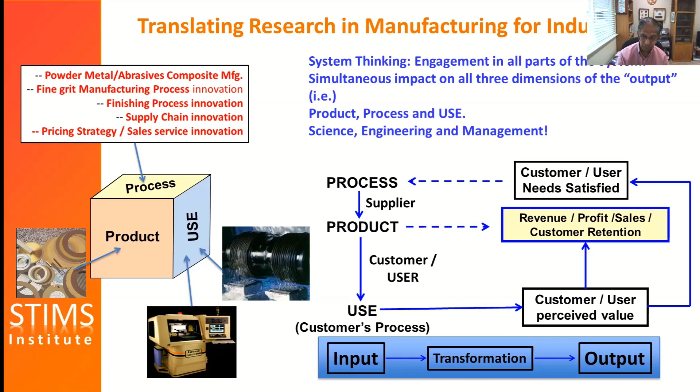What is the science of grinding? In fact, this model for science of grinding can be used for any number of applications. First of all, if you think of any abrasive application, you've got an abrasive producing a chip, and then abrasive, if it's not producing chip, it is plowing or displacing the material, or sliding on the work material, or the chip sliding on the bond material, chip sliding on the work material, or the bond itself sliding on the work material. So it doesn't matter what abrasive application you can think of, these are the 6 interactions that are taking place all the time.

So when you've got 6 interactions, you've got a normal force and a tangential force, so you've got 12 vectors. So every grinding application comes down to managing the grain work, bond work tribology, machining cycle, grain work, bond work tribology as a function of time, chip bond, chip work tribology as a function of time, so that the 1st vector is here, 2nd is here, 3rd, 4th, 5th, and 6th.

And within the 3rd vector, which is machining, you design a grinding cycle where you have a very high force in roughing, semi-finish, finish, and so forth. When you come to spark out, you're having only grain work tribology. So in which of these 6 interactions or 12 vectors are you interested? Why? Are these time dependent? For how long? Can they be constrained to be within some limits?

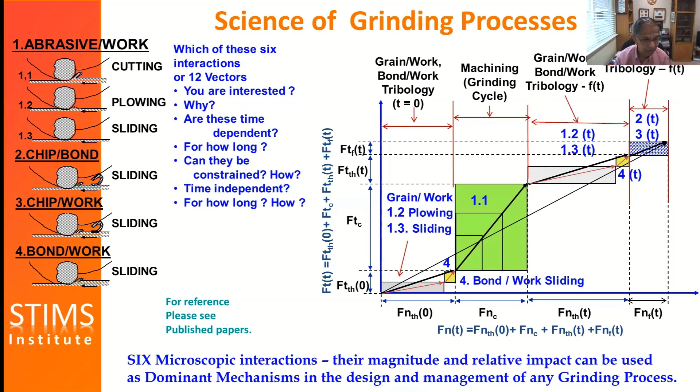So essentially, 6 microscopic interactions, their magnitude and relative impact can be used as dominant mechanisms in the design and management of any grinding process. So I have finished teaching you the science of grinding in 2 minutes. Okay, now let's go to the science of ceramic materials.

In the grinding of ceramic materials, the same interactions have to take place, but the only difference is the grain-work interaction can be cutting, which will lead to brittle fracture or ductile deformation. There is hardly any plowing, or there will be a lot of sliding. And this is from the literature. You can get the whole thing from the reference for this.

Essentially what they say is, when the radius of the indenter is large and the applied force is large, it doesn't matter what you do, you'll always have cracks in ceramics. When the radius of the indenter is small, even then when the applied force is large, you'll have brittle cracks of a different kind; you will also have a median crack in addition to lateral cracks. Whereas in a ductile material, whatever the radius or force you use, there will always be deformation.

But there is a sweet spot in ceramic materials where the radius of the indenter is small and the force applied is small, and you end up having ductile deformation. Now, the reasons will vary with the material, its fracture toughness, and so on. But essentially, you're trying to operate in this regime. And if you operate only in this regime, it will be called ductile regime grinding.

But on the other hand, you can always be sure, because of this interaction, some interactions will take place in the direction of brittle fracture, some towards ductile deformation. But it depends upon the chip thickness, which is the volume of indentation. It depends on the force per grain. It depends upon the abrasive particle size, which influences both of them.

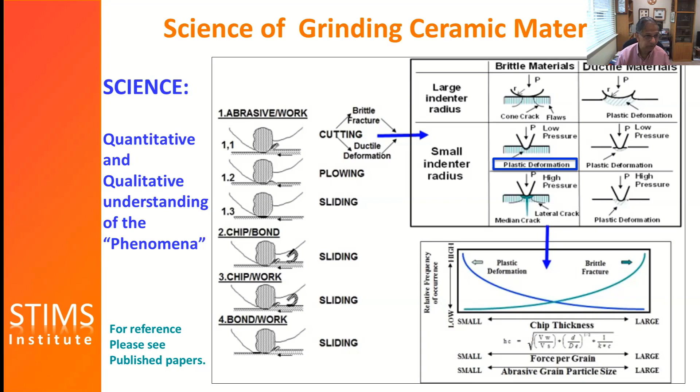So essentially, the more you skirt towards the left-hand side, you have ductile deformation. The more you move to the right-hand side, you've got brittle fracture. So in addition to the general issues of grinding that you normally deal with, you have to manage this balance. Essentially, that's what makes the difference between ceramic grinding and grinding of ductile materials. Okay, now we have understood the science, but you have to translate that into application. That's what engineering is all about.

So that same picture I showed you now becomes translated into how it is affected by machine tool properties, processing tool properties, work material properties, operational parameters during the process and output. It'll take me some time, so I will not go into the details. So essentially, you're trying to stay mostly on the left-hand side and never go into the right-hand side. But you can live with some degree of brittle fracture, as long as it's not substantial.

And you can live with some brittle fracture in roughing, but you can get it off in finish grinding, just like you remove the very coarse surface roughness of rough grinding in ductile materials and reduce that in finish grinding. Except here, you're not trying to manage the surface finish, you're trying to manage the micro cracks. Typically, most of the literature said ductile regime grinding, operating only in this regime, but that is not economical or practically feasible.

So what we did was take what is available in the literature, we came up with this model, and we understood that we had to stay in a certain regime. Within that regime, you can design a roughing grinding cycle and a finish grinding cycle for economics, productivity and so forth. And you could indeed achieve very high surface quality and low brittle fracture and cracks.

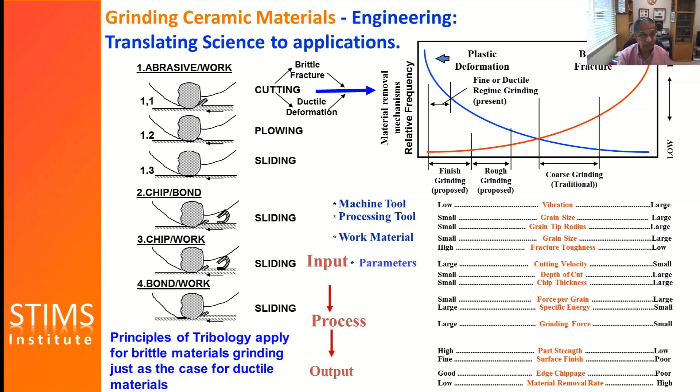As a scientist, I'm not here to make politics or arguments or anything like that. But that is what science allows you: to think differently from others. Now, you can go crazy, because a scientist is also supposed to demonstrate his capabilities in areas that did not exist before.

Here A1 and A2 are two surfaces, both on the same material, except when thermal issues are not managed, it's not brittle fracture. When thermal issues are not managed, you'll end up with A1. When thermal issues are managed, you get a very good surface, A2. Also, you can grind very mirror-like surfaces on a cylindrical surface or a flat surface.

You can take a hollow tube and grind it into a worm and create a spring out of it and then collapse it like a metal spring. If you bounce a metal spring, you can bounce it forever, it may not break. A ceramic spring also, by the way, I have bounced with a great degree of confidence, except you bounce it 10 or 20 times, it will break eventually. But you can make ceramic springs and collapse them just like a metal spring.

You can grind ceramics to a very thin diameter, as shown in E, without any end support, because the force per grain and the grinding conditions are so good that you can manage that, and because the material has its own inherent strength. You can grind a silicon wafer, which is a brittle material, and bend it like a plastic sheet of steel. You can grind a sapphire so plane and so good in surface quality that it becomes transparent.

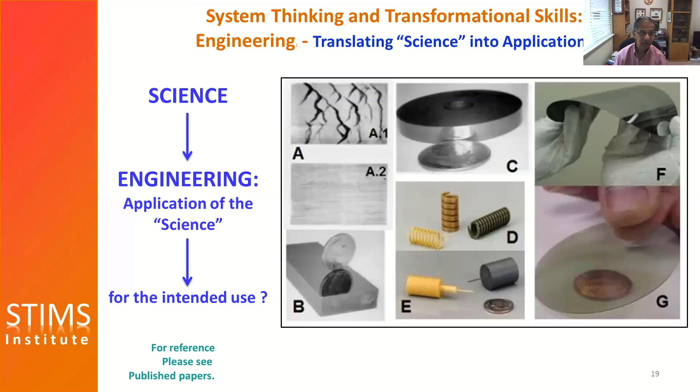So all this research becomes useless unless there is somebody to listen to. So I took this work and visited many companies who had a need. And lo and behold, this is where serendipity comes. IBM, San Jose, this is where I'm living now. I made this presentation. A gentleman by the name of Dick Satterfield told me that they have a need to make thin film heads for the disk drive industry.

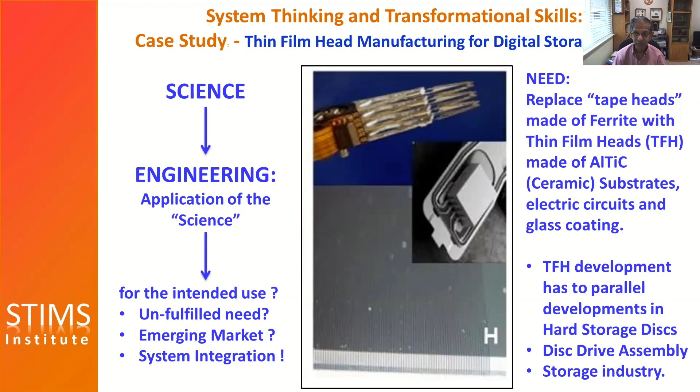So essentially, I've done the science, you've done the engineering. Now you have to go into the application of the engineering for an intended use that's not fulfilled. But you also have to make choices. It has to be an emerging market. It also requires system integration. This is where the word system comes in. So this was for thin film head development for the hard storage industry. So essentially what you see here is the thin film head.

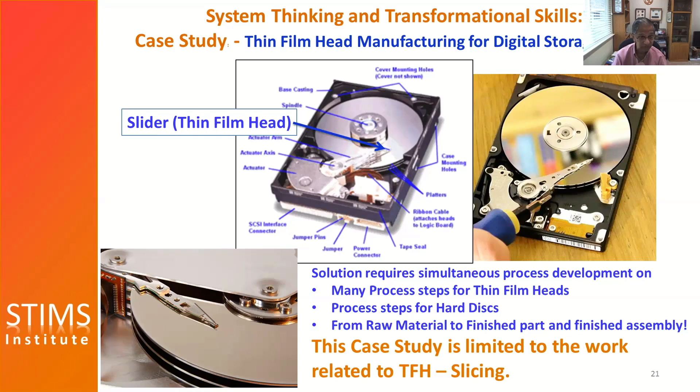Now, again, there were so many steps involved in this process, but let me just stay with only the slicing portion of it. So essentially, we ended up with a grinding wheel. It's a metal bonded grinding wheel, with a thickness of 40 microns to 200 microns. These are made of powder metal composites, and they are processed for gang slicing. And this is the set here. And we did all of those things.

But before that, we had to do process innovation. I can tell you so many things we had to do. We'll come to it in a minute. Essentially, in order to make this grinding process, we had to come up with a metal bond technology. And then the wheels had to be made in very large quantities. The process had to be developed for that. But when you make them, these have to be flat and parallel within micron thickness. Normally, grinding wheels are not made to that thickness.

For which you had to develop a lapping process. So when we finished the lapping, we had to get a machine which was $200,000 for lapping. That division had only $1 million for the total capital spending. So here I'm a new guy in the company, and I'm telling my boss, I need a machine for 200,000.

So I had to take the technician who worked on the factory floor, by name George Staten, along with me to see the vice president to say, sir, don't believe me, but this is the man who has been with you for 25 years. He says he can make it work. And he says, with this machine, we can get a great new business. So he's not trusting me, he's trusting George Staten, who doesn't have an education, but who has got experience and trust in the company. So essentially, what I call emotional intelligence, which I talk about later on, has to be part of the innovation.

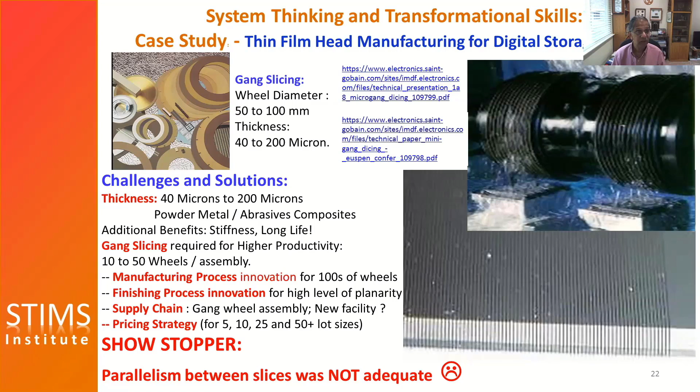And only I can do the pricing because I know the technical side, I know the engineering side. But if I give the pricing to a traditional pricing department, they can't handle it. In fact, today, most of our supply chain solutions, if you try to make any variation, will kick it out as non-standard. So most of the things we do as industrial research will be non-standard. So this is where most people who do research in industry today suffer and fail, because they cannot go beyond the comfort zone of engineering and into the pricing, into supply chain. All of those things are required in order for the solution to be completed.

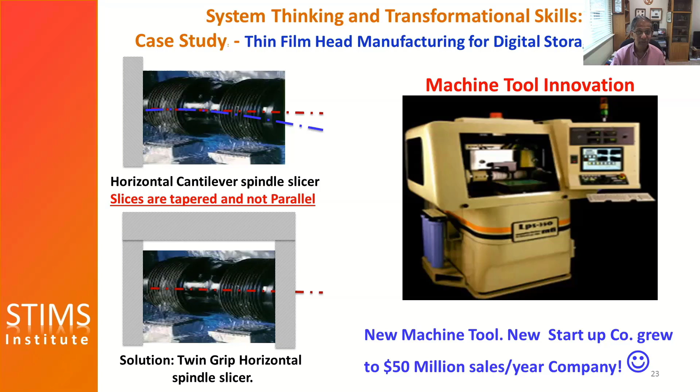So after doing all of those things, we still were not successful, because once you're doing slicing, everything was being made, productivity, everything was good, except the wafers were not plane and parallel. What do you do then? Then you find out that this horizontal spindle surface grinder we're using with a heavy spindle on it was deflecting. We had a cantilever beam. So we had to solve the problem by coming up with an outboard support, like you do in a centerless grinding machine. So that resulted in a whole new invention of a new machine, and the startup of a whole new company to make these machines called MTI. So in the late 80s or early 90s, when everybody said the machine tool industry is dying, this machine tool company came out of the ground, and that essentially ended up with a solution where you have a new machine tool with a new design, precision.

Now we are coming back to the system description of our solution with more details in it. So you see new machine tool with a new design. Also it has to have precision, step and speed capabilities, manufacturing and distribution, customer testing, qualification support. Many of these things most machine tool companies would not offer because they only want to make the machine and sell it. Customized wheel fabrication for different thicknesses and spacing, gang assembly. They also have to have distribution services because IBM San Jose may want something and then IBM Mainz in Germany may want something else, on and on. But once we open our mind, we can learn all these things and accommodate all these changes. Anyway, custom wheel fabrication, gang assembly, distribution service.

On the grinding wheel side, we had to come up with a new design, new composition, new process, new finishing solution, pricing strategy, people, team, I told you all those things. On the component side, materials technology kept changing as they came closer and closer to commercial. Dedicated pull customer. That is the biggest thing. If you've got a pull customer who is part of your team and wants to make it work, there's nothing better than that.

Like rapid growth market and many startups. And this is what you have to pick ahead of time. Just because you did research and whoever wants it, you just keep trying it. And there are lots of people who want to try because they're task oriented. You have to be system oriented and find the right partner who really wants to make a difference. And many startups were at that time.

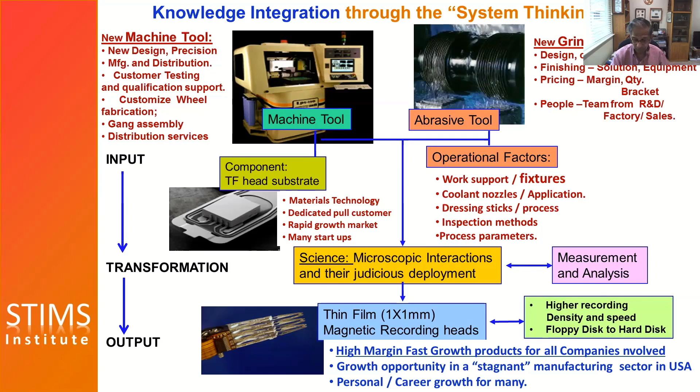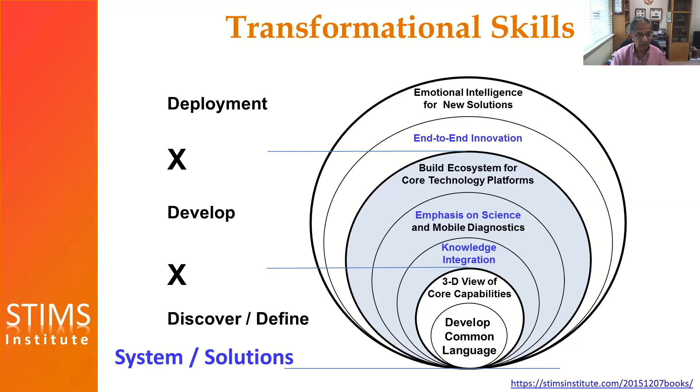So to summarize it, I told you about system thinking, and there are a set of several transformational skills, of which I talked about the emphasis on science, knowledge integration, and end-to-end innovation. But there are others. Each one of them will constitute a seminar by itself. In fact, ideally, a course can be taught on system thinking and transformational skills, about 10 to 12 classes, that will be very valuable and powerful, not only for your students, but also for people collaborating with you from the industry, and not only for your department, but across many departments.

So to summarize then, yes, we need academic education, which you are all providing very nicely. You also need industry collaboration, because that's where the rubber meets the road. But you also need transformational skills, which are not formally taught today. And without that, we are acting only in activities that are task-oriented, and we don't have the time. You have to reverse the direction of these arrows, from doing what you're asked to do and saying, I don't have time, I don't have a result, life is frustrating, to a transformational mode where you must be goal-oriented, where every day you do something that must have some technical output and a system output, which leads to system thinking, common language.

We only had the beginning of the common language today, emphasis on science, knowledge integration. Then we go to end-to-end innovation, core technology platforms, emotional intelligence of innovation, and ecosystem development. So what I have told you today allows you to think in terms of moving away from task to goal. From there, you need to move into impact, and finally into sustainability.